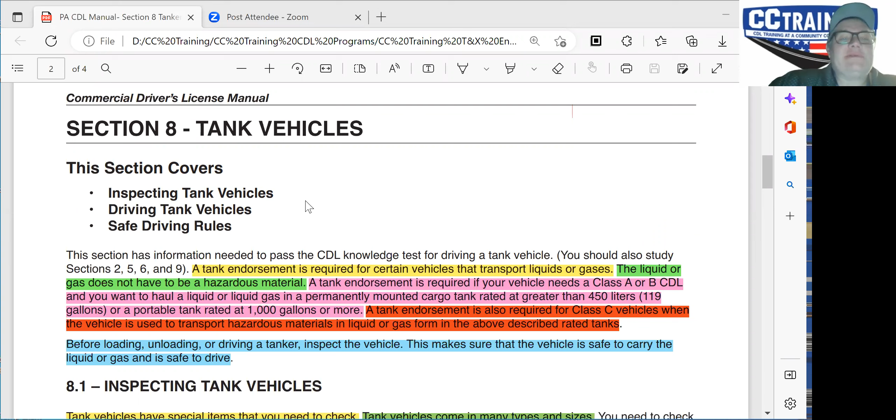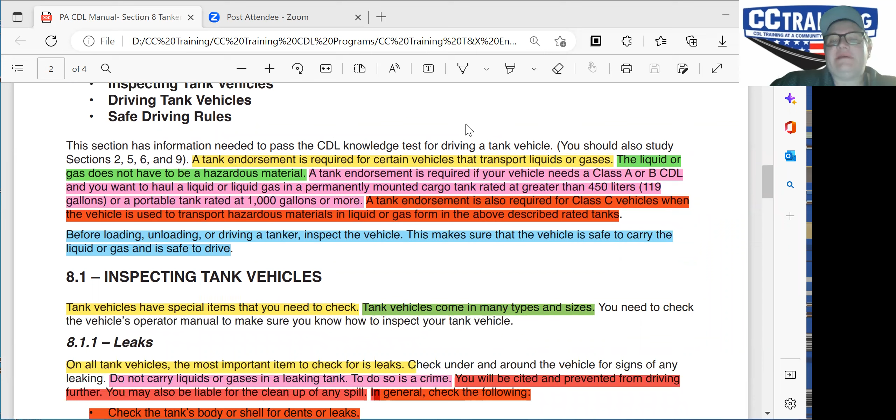All right, so Section 8, tank vehicles. This section covers inspecting tank vehicles, driving tank vehicles, and safe driving rules. It has information needed to pass the CDL knowledge test for driving a tank vehicle. You should also study sections 2, 5, 6, and 9.

A tank endorsement is required for certain vehicles that transport liquids or gases. The liquid or gas does not have to be a hazardous material. Tank endorsement is required if your vehicle needs a Class A or Class B CDL and you want to haul a liquid or gas in a permanently mounted cargo tank rated greater than 450 liters or 119 gallons, or a portable tank rated at 1,000 gallons or more. A tank endorsement is also required for C-Class vehicles when the vehicle is used to transport hazardous materials in liquid or gas form in the above described rated tanks.

Before loading, unloading, or driving a tanker, inspect the vehicle. This makes sure that the vehicle is safe to carry liquid or gas and is safe to drive.

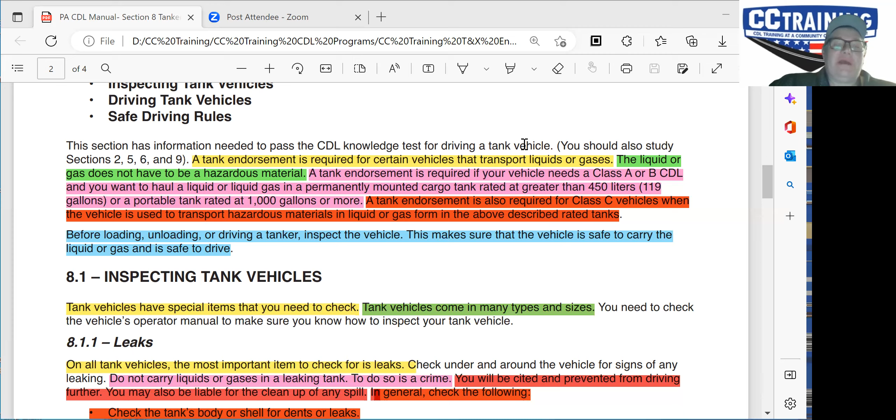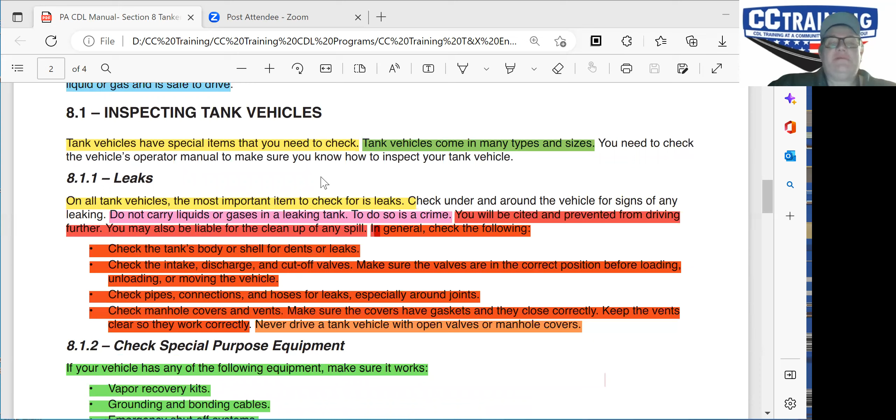Inspecting tank vehicles: tank vehicles have special items that you need to check. Tank vehicles come in many types and sizes. You need to check the vehicle's operator's manual to make sure you know how to inspect your tank vehicle.

8.1.1 Leaks. On all tanks, the most important item to check for is leaks. Check under and around the vehicle for any signs of leaking. Do not carry liquids or gases in a leaking tank. To do so is a crime. You'll be cited and prevented from driving further. You may also be liable for the cleanup of any spill.

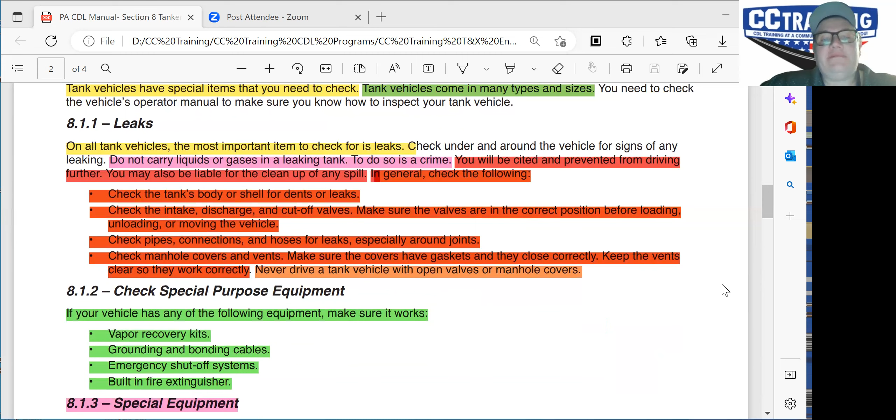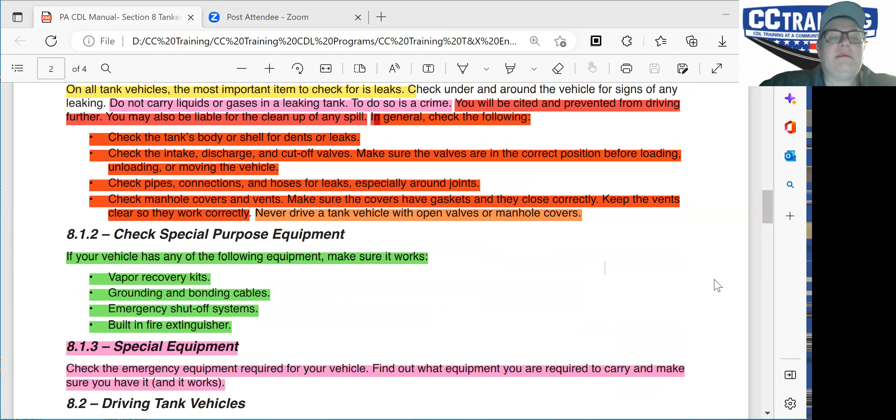In general, check the following: check the tank's body or shell for dents or leaks. Check the intake, discharge, and cut off valves. Make sure the valves are in the correct position before loading, unloading, or moving the vehicle. Check pipes, connections, and hoses for leaks, especially around joints.

Check manhole covers and vents. Make sure the covers have gaskets and they close correctly. Keep the vents clear so they work correctly. Never drive a tank with open valves or open manhole covers.

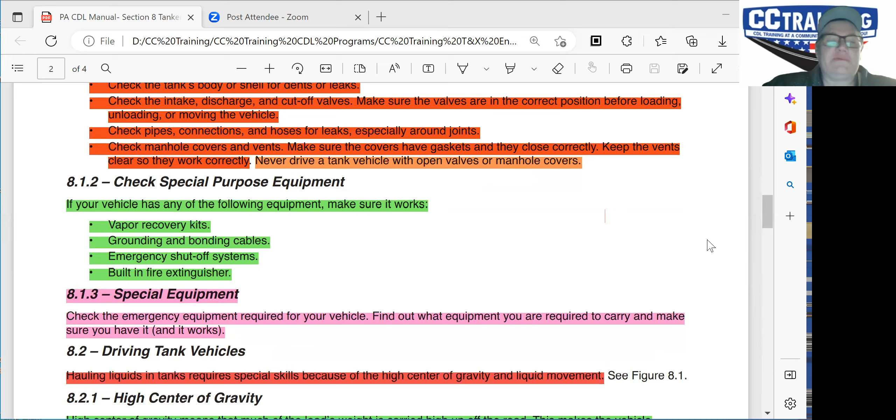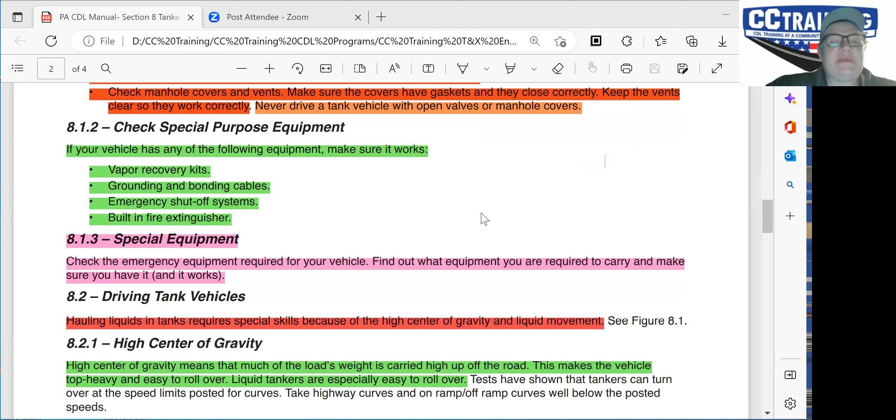Check special purpose equipment. If your vehicle has any of the following equipment, make sure it works: vapor recovery kits, grounding and bonding cables, emergency shutoff systems, built-in fire extinguisher. Check the emergency equipment required for your vehicle. Find out what equipment you are required to carry and make sure you have it and it works.

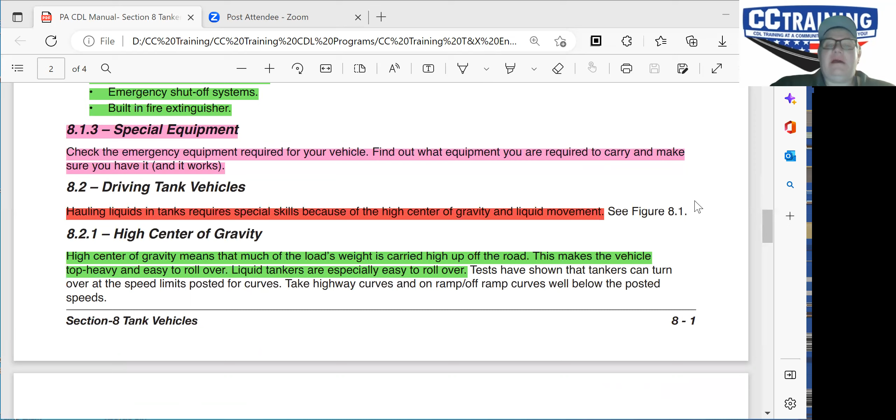Driving tank vehicles: hauling liquid in tanks requires special skills because of the higher center of gravity and liquid movement. High center of gravity means that much of the load's weight is carried high up off the road. This makes the vehicle top heavy and easy to roll over.

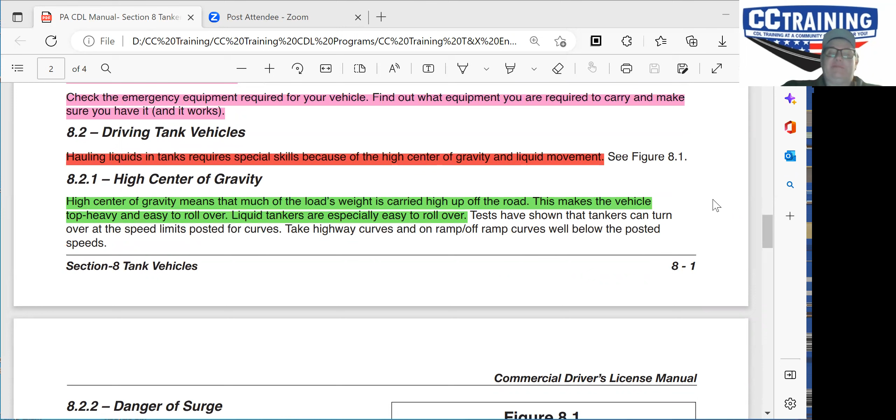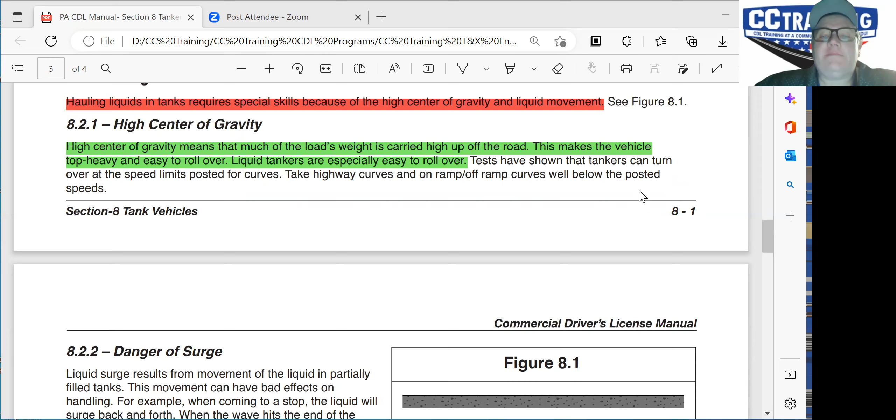Liquid tankers are especially easy to roll over. Tests have shown that tankers can turn over at speed limits posted for curves. Take highway curves and off-ramp curves well below posted speed limits.

Danger of surge: liquid surge results from the movement of a liquid in partially filled tanks. This movement can have bad effects on handling. For example, when coming to a stop, the liquid will surge back and forth. When the wave hits the end of the tank, it tends to push the truck in the direction the wave is moving. If the truck is on a slippery surface, such as ice, the wave can shove a stopped truck out into the intersection. The driver of the liquid tanker must be very familiar with handling a vehicle.

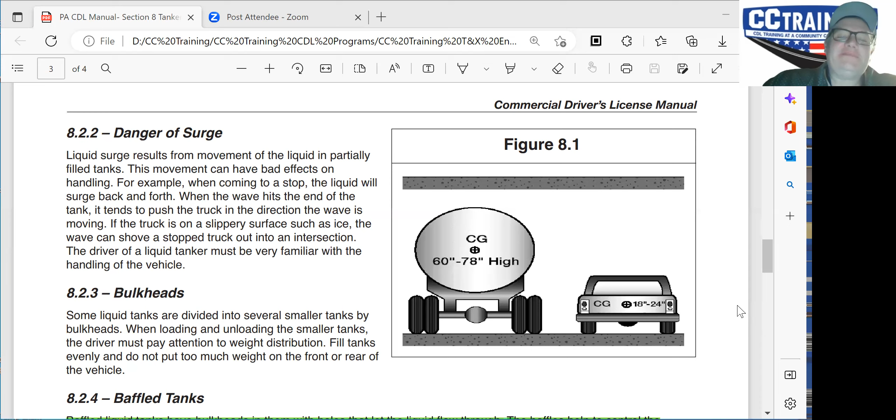Let me tell you guys a little story, right? My brother, when he first got his license, he went to work for the company I was working for. At that time, it was a construction company, right? And we had this grading foreman, and he was a bit of a prima donna, you know. Everything had to be absolutely perfect, and he was the kind of guy who puts down rags over his floor mats when you get in the vehicle.

Well, my brother, this is his first time driving a tanker. He got his endorsement, but he never drove a tanker before. He pulled up behind this guy and stopped and took his foot off the brake, and the surge pushed him right into the guy.

The surge pushed him right into this guy's truck. Oh my, it was considered an accident? Yeah. What makes it so funny is, day one, you wrecking the boss's truck.

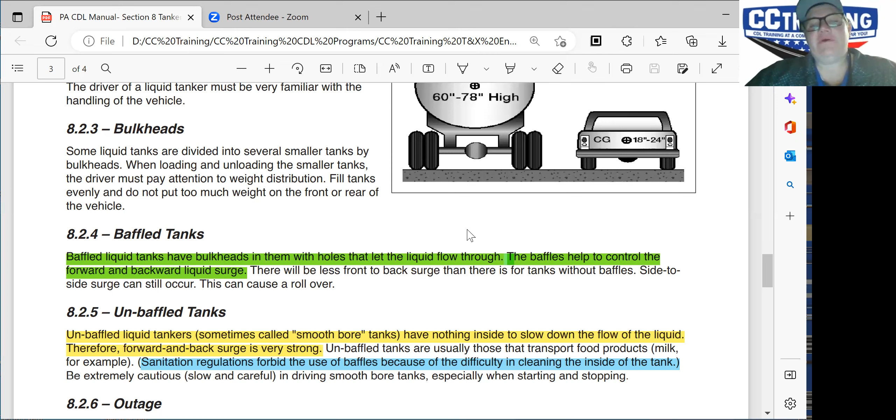Baffled tanks are liquid tanks with bulkheads that have holes letting liquid flow through. The baffles help control forward and backward liquid surge. There'll be less front to back surge than there is for tanks without baffles. Side to side surge can still occur.

Unbaffled liquid tankers, sometimes called smoothbore tanks, are the worst ones, because they've got nothing to slow that liquid down. They have nothing inside to slow the flow of the liquid, so forward and back surge is very strong. Unbaffled tanks are usually those that transport food products.

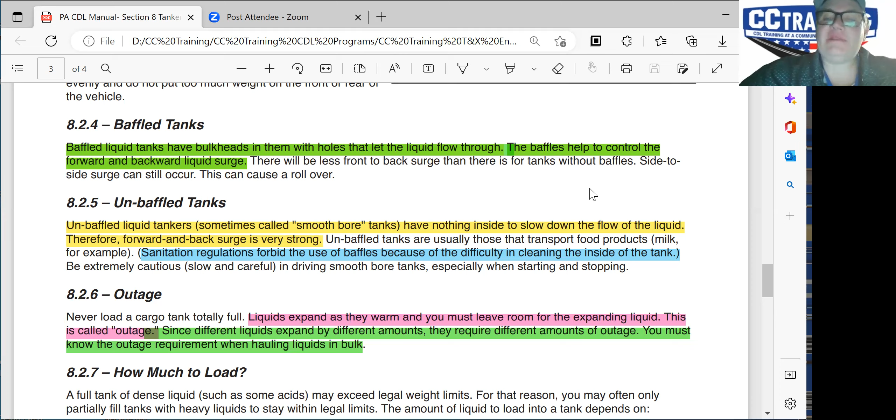Milk, for example. Sanitation regulations forbid the use of baffles because of the difficulty in cleaning the inside of the tank. Be extremely cautious, slow, and careful in driving smoothbore tanks, especially when starting and stopping.

Outage, real quick sir. Go ahead. Sure, yeah, absolutely. They pump it into the tanker and take it to a facility for pasteurization, or it'll be pasteurized already and they'll take it somewhere else where it can be bottled. I'm not exactly sure how they do that, but they do move it in large tankers.

All right, so outage: never load a cargo tank totally full. Liquids expand as they warm, and you must leave room for the expanding liquid. This is called outage. Since different liquids expand by different amounts, they require different amounts of outage. You must know the outage requirement when hauling liquids in bulk.

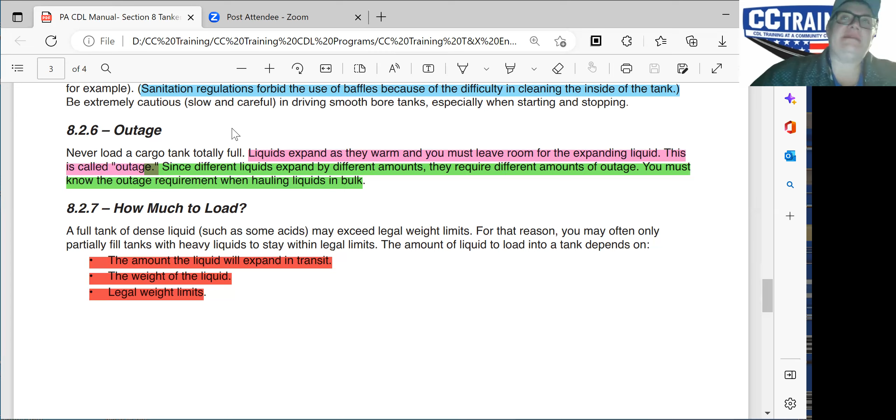How much to load? A tank full of dense liquid, such as some acids, may exceed legal weight limits. For that reason, you may often only partially fill tanks with heavy liquids to stay within legal limits. The amount of liquid to load into a tank depends on the amount the liquid will expand in transit, the weight of the liquid, and the legal weight limits.

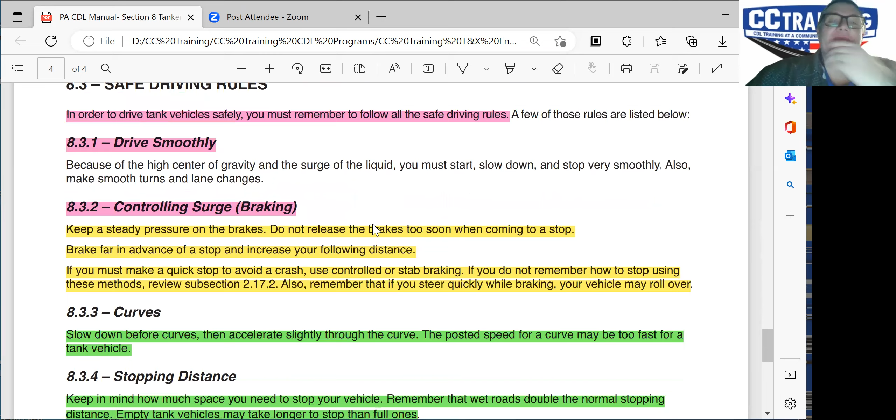Okay, that's on the test, by the way. Anything you see highlighted in here is going to be on the exam for this section.

In order to drive tank vehicles safely, you must remember to follow all safe driving rules. A few of these rules are listed below. Because of the high center of gravity and the surge of the liquid, you must start slow, slow down, and stop very smoothly. Also, make smooth turns and lane changes.

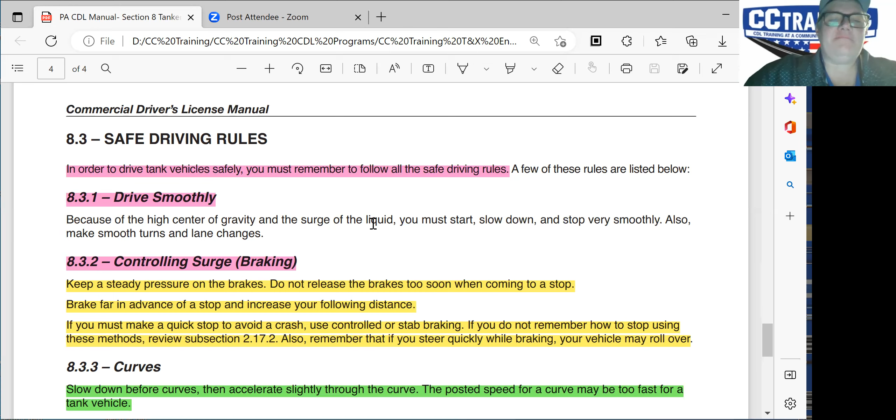Controlling surge and braking: keep steady pressure on the brakes. Do not release the brakes too soon when coming to a stop. Brake far in advance of a stop. Increase your following distance. If you must make a quick stop to avoid a crash, use controlled or stab braking. So with a tanker, if you have to do an emergency braking maneuver, use controlled or stab braking.

Well, you would think so, but that's what it says, so that's the answer. Controlled or stab braking with tankers is what they're saying. I agree with you. So really, you never want to have to brake hard.

And if you're applying those 5 principles about your following distance, watching your mirrors, and looking 12 to 15 seconds ahead, making sure you don't have anybody beside you, and you've got adequate following distance, it's very unlikely you'll ever have a hard braking event. There are occasions where it happens, like if you're on a back road and a deer runs out in front of you, you may brake hard just from reflex. But yep, flatten them out, that's all you can do.

If a deer hits in front of the tractor, is it worse than when it hits the side? Carl said he ran out to the side and got caught in the wheels—it was destroyed, but had no effect on the motion of the 18-wheeler. So if it runs out in front of you and you run over it, will it affect your driving, make you steer off course, or do any damage? Not if you're loaded—you'll flatten that dude right out, you won't even feel it. Yeah, you'll steamroll him, dough roll him right into a pizza.

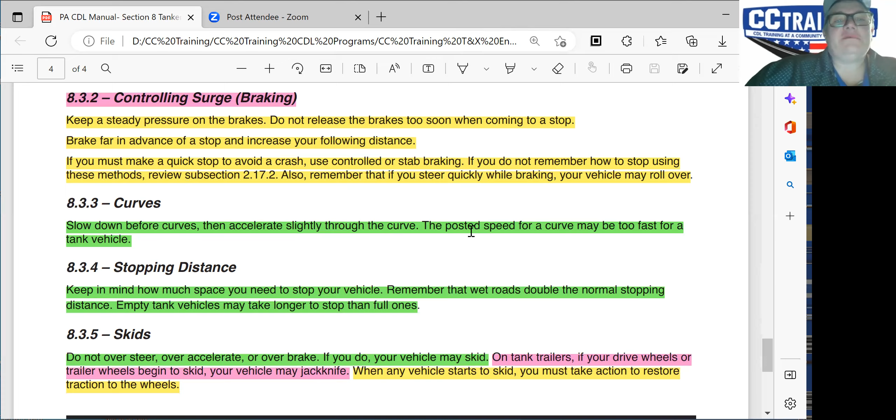All right, let's see here. Curves—slow down before curves, then accelerate slightly through the curve. The posted speeds for a curve may be too fast for a tank vehicle. Stopping distance—keep in mind how much safe space you need to stop your vehicle. Remember that wet roads double normal stopping distance, and empty tank vehicles may take longer to stop than full ones.

Skids—do not oversteer, over-accelerate, or over-brake. If you do, your vehicle may skid. On tank trailers, if your drive wheels or trailer wheels begin to skid, your vehicle may jackknife. When any vehicle starts to skid, you must take action to restore traction to the wheels.

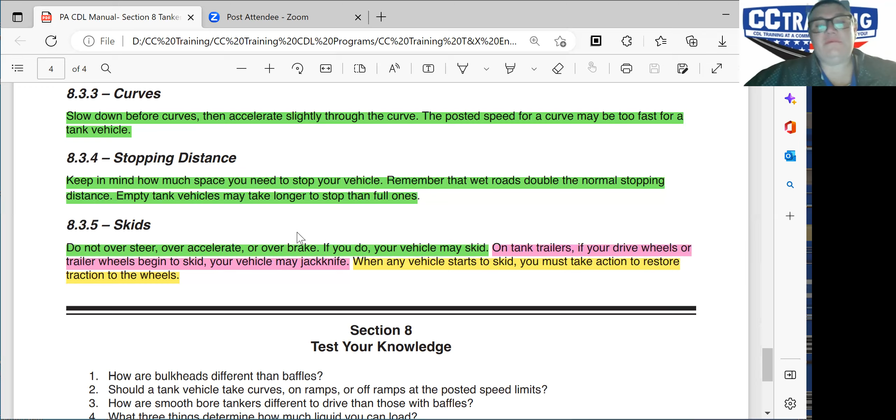Should a tank vehicle take curves on ramps or off ramps at posted speed limits? No, it should be slowed down, smooth, controlled—slowed down to the point where it's a controlled stop. That's number 2, right? Yeah, number 2. So tank vehicles should definitely be going well below the posted speed limit, well below. Yeah, and downshift before you go into the curve.

How are smoothbore tankers different to drive than those with baffles? Smoothbore doesn't have anything stopping the flow of the surge, so it's more dangerous. That's right, the surge is much stronger in a smoothbore tank. Yeah, that's right.